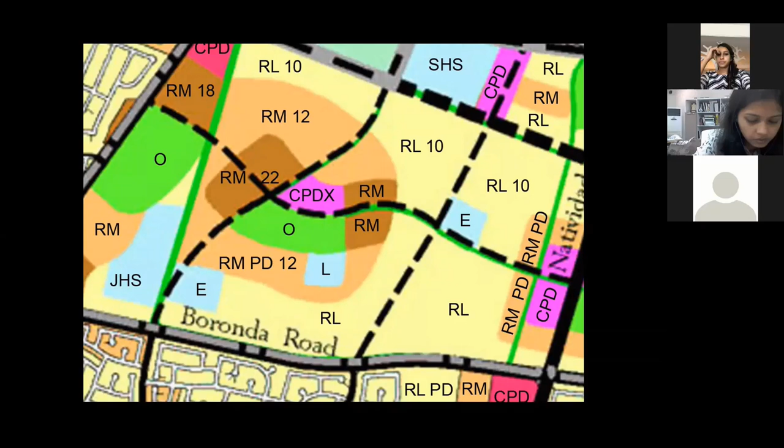Now, why did this happen? Because in the 1920s and 30s, when there were factories and they were throwing out toxic fumes, you could not live next to the factory. So the law had to be passed to take the residential areas far away from the factory. But this is not the 1920s. Many things have changed. Because of land use planning, what has happened is we are now living in cities where your office area is far away.

You have to rely on the car. You have a freeway, you have a highway, and there's traffic congestion and all these things. So before we go further, I want you to understand land use planning is a huge problem. It's a big legal problem in our city. The fact that you are not allowed to work where you live, that there is only a residential area, and this is largely residential, and you're not allowed to put office buildings there, is a huge problem.

I want you to know that in a place like Japan, I don't know how many of you have been to Japan, it is exactly the opposite. Tokyo is the densest city on the planet, and one of the most interesting cities on the planet. And the reason it is so interesting is because in Japan, the zoning is the opposite. In Japanese zoning, they never tell you which uses you can put. So if you have a plot of land, you can put residential, commercial, everything there.

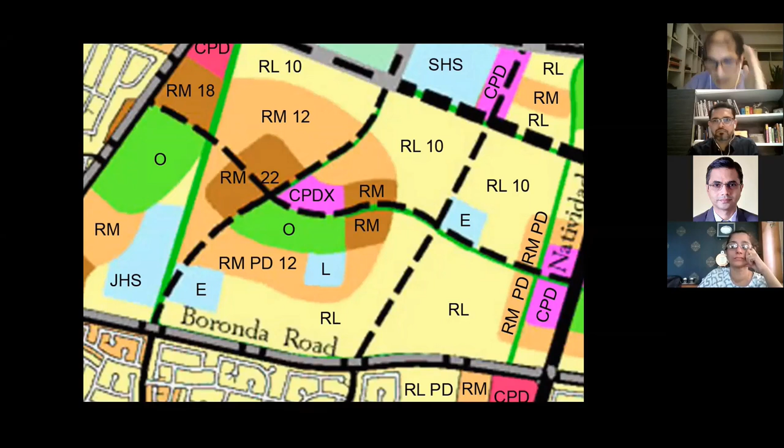The only rules they tell you is in certain areas, you cannot put industrial uses. In certain areas, you cannot put office use. This is very important. So basically, Japanese cities are constantly mixed in use. You can work, you can live, you can do whatever you want. It's very beautiful. So this is why Japan is very pedestrian. People don't have to go far away. And there are trains to connect. So land use planning is a big problem. It's a problem in Bombay, it's a problem in Goa, it's a problem everywhere.

The second problem is FSI. The biggest problem is FSI. We all know this, but let's try and understand what it really means. The funny thing we have discovered is FSI has very little relationship with building height, because you can take the same FSI and you can do a 1-story building, a 3-story building, a 7-story building. In theory, this is exactly true, right? Think about it. It's purely mathematical, right?

So in order to avoid this, they put another mathematical number called coverage. Coverage means in a certain area, you're only allowed to cover 80% of the plot, 60% of the plot, 50% of the plot. So what happens as a result is different people who are designing adjacent to each other have no rule that talks about how these buildings come together to make something nice. So I'll give you a classic example.

If you have 5 plots of land in Goa, let's take Azad Maidan. This is a place we know very well. Imagine tomorrow, for some magical reason, all the plots around Azad Maidan were empty. And we had this rule of FSI. FSI is, say, 1. Now, one person can come and design a 1-story building. One person can design a 2-story, 3-story, 4-story.

Right? This building right here is right on the street. This building is set back from the street. This building is even more set back from the street. This building is a tower. This building is a mid-rise. This building is a low-rise. What kind of Azad Maidan are you going to get?

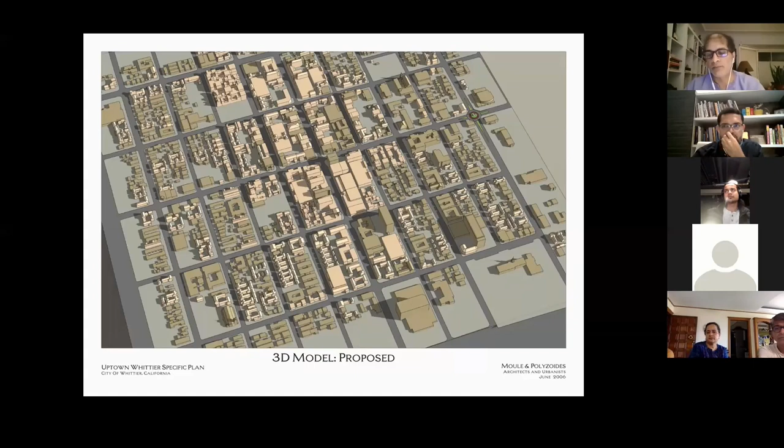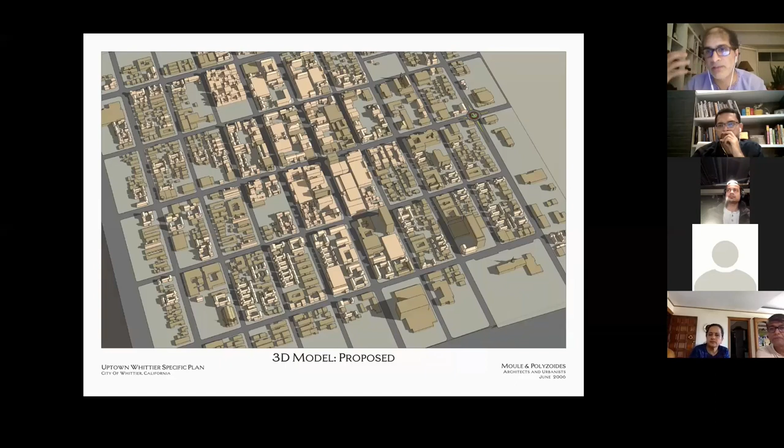So Pratima, this is a very important point that both Cedric and you are making. Basically, what you're pointing out is the perceived animosity between the public and the private sector, which is not good. Because everything you said just now basically implies that you are feeling the weight. You feel responsible that, damn it, I'm doing whatever I can, but the other side is not doing its job.

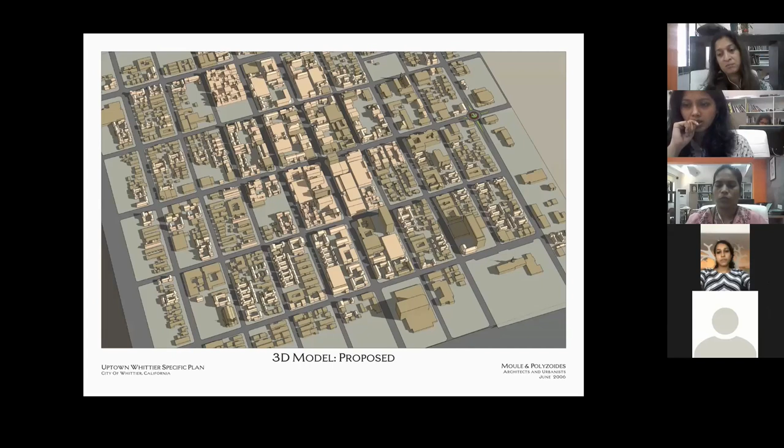The only reason we have been able to be successful in the US and maybe a couple of other places is because we have been able to call the authorities and the developers in the same room. This is the whole point I'm trying to make. So there are two ways of doing it. One is what Cedric is saying, where the private entity, the developer, says, I want to put higher density here. Give me the FSI. I'm hiring some of the best architects.

We'll give you a fantastic product. This will bring you a lot of economic return in the city, and I will pay for it. That is one way of doing it. The other way of doing it is you negotiate.

For example, there are cities which are desperate to get money. You know, every city is a corporation, right? Every city is a municipal corporation. They want to make money. They have a tax base. So imagine a city that is not doing very well. It's not making enough money because the neighboring cities are cannibalizing on its economy.

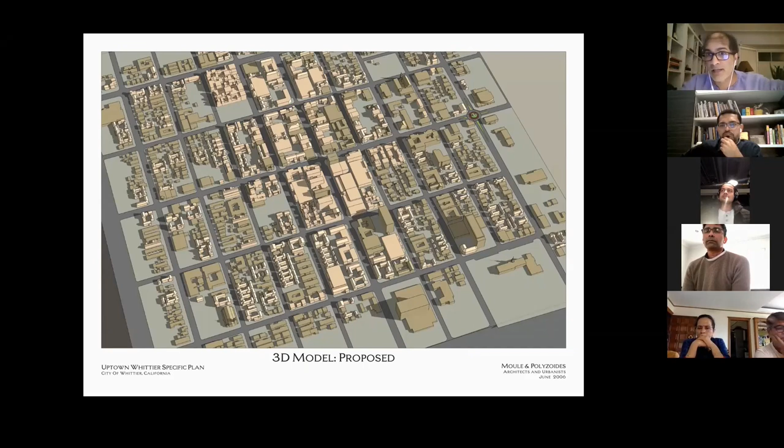Now, in such a city, you cannot make the rules very strong, because if you make the rules very strong, no developer is going to come to do development in that city. There's going to be no money. So what these cities can do is they try to put a carrot, you know, to lure developers, to attract developers. So they tell a developer, look, developer, we have some rules.

We will build a garage for you. We will give you an approval in 3 months instead of 6 months. All you have to do is come and follow our rules. So there are various ways, various cities, depending on what their circumstances are, create these kind of partnerships.

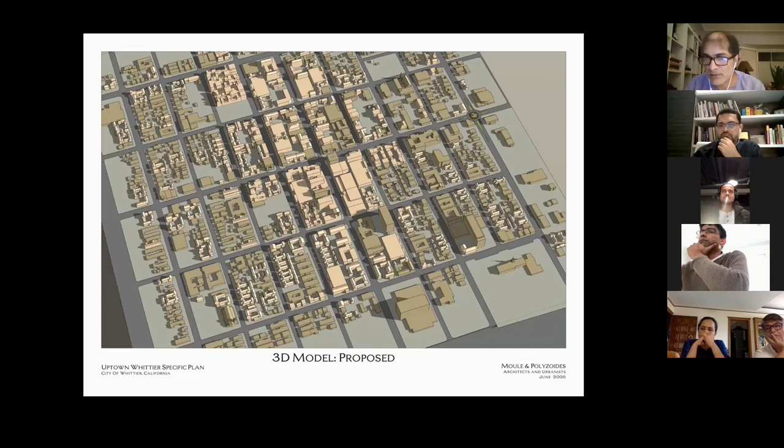The point Cedric is making is, whatever the case, the public and the private has to talk to each other. This is what you're saying, Cedric. I mean, even in the example you gave, the public sector talked to the private sector and said, look, developer, you have to pay for this. We'll allow you, but you have to pay for it.

Exactly. So this is very important for India, particularly for Goa, because the political connections that many of you have are going to be extremely important here. At the end of the day, every time we have an opportunity to do a project like this, every time we have been successful, the only reason we have been successful is because the mayor and the politicians of the city back it.

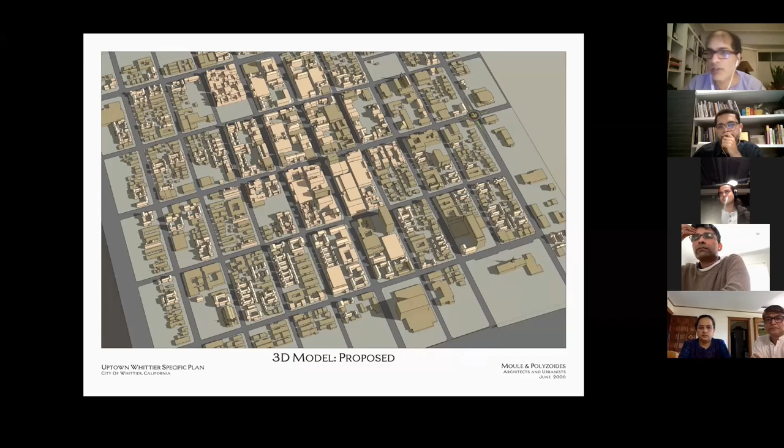If you cannot have the political structure back this kind of transformative instrument to change the vision of the city, the architects can do whatever they want, but it's meaningless, because we are powerless in the larger game of cities. We are small players. I always say to my friends, you know, it's like if you're playing the game of chess. Architects are the pawns. I don't know if you play chess. Cedric plays very well, but you know, the pawns.

But what we don't realize about a pawn is, if a pawn tries to act too smart, he'll get killed. But if a pawn works with the bishop and the king and the queen, you can make a checkmate in no time. The pawn is very smart. The pawn can do moves that nobody else can do.

So if architects learn how to work with politicians, administrators, mayors, planners, a lot of good things happen. So instead of thinking of ourselves as some kind of artist sitting in isolation and thinking of how crazy the world is, if we bring everyone to the table, I think it will be much better, particularly in Goa, because there is a lot of interesting political will.

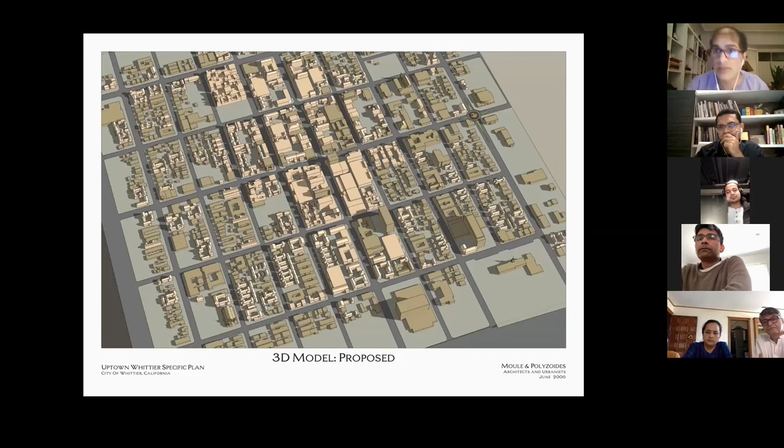There are a lot of people who think about these things. You just need to bring them in one room, and you need to put them on the table with people they know. So the more politicians you know, the better our chances of doing this. This is very, very important.

So out of this process, you get a drawing like this. This is a simple drawing, nothing big about this, that basically shows you where the infill, the new development can happen, how the streets can be treated, because you want the public spaces to be very nice, and you have an engineer that tells you what the capacity of the streets can be. That engineer could be from the city, or that engineer could be hired by us.

But basically what you're doing is, the architects are doing the design, the engineers are doing the utilities, and the landscape architects are doing the public land. These three things have to be done in the same room in that 1 week. We also have an economic consultant typically on projects like this, who is doing the calculation of how much revenue your real estate is going to be. So that is extremely important. So the more disciplines you have, the better it becomes.

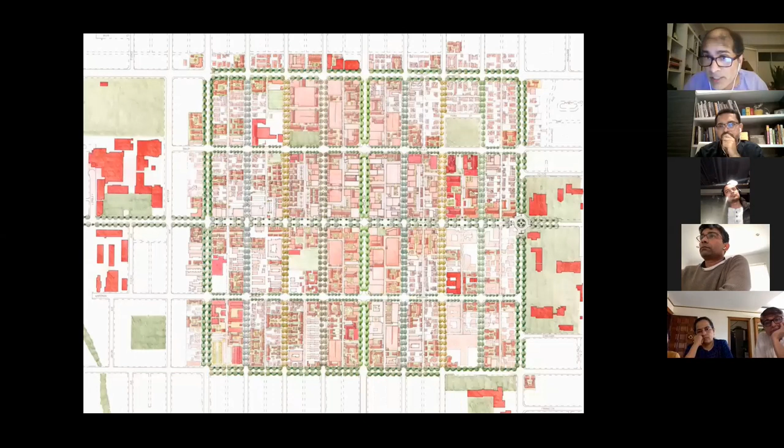Now the question is, all this is good, but how do you make a law out of it? So what we do is, here are all the plots of land, right? You can see there are streets, there are plots. Everything that you see in dark red is the area where the height is the highest, not FSI. I'm not even talking about FSI.

FSI is thrown into the garbage. These are the tallest buildings in the city. This is the place where the setback is the least. This is the place where the building can cover almost 100% of the lot. So in other words, this is the densest part of the city, because I've already decided along with the people in the community that this street is where they want the density.

Why? Maybe because there is a train track there. Maybe because there is a major bus line there. Maybe this connects an important opera house to something else. I don't know. That is all design. But because it's an important connection, you put the density there. Then you have the peach color, which is slightly lower height, slightly bigger setback. Then you have the orange color, which is even less. And then you have the yellow color, which is even less.

Now I'm coming into FSI, because if a planner comes to our charrettes, usually they ask me, what is the FSI? So what we do typically is we say, look, you can do an FSI calculation. If you say that the total FSI of this area should be 5, okay, fine, no problem. Here's what I will do. I will make the FSI 10 here, 7 here, 5 here, and 2.5 here. If I take the average FSI of this place, it will still be 5.

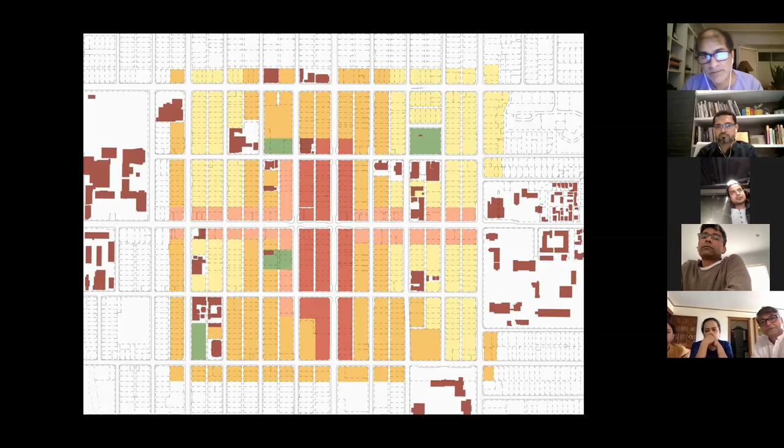Now comes the various laws. What are the laws we write? The first law is the land use standard, because planners still like to know what is permitted here, right? Which use is allowed here? They want to know. So what we say is, okay, let's get it out of the way. Big deal. So here is the rule chart.

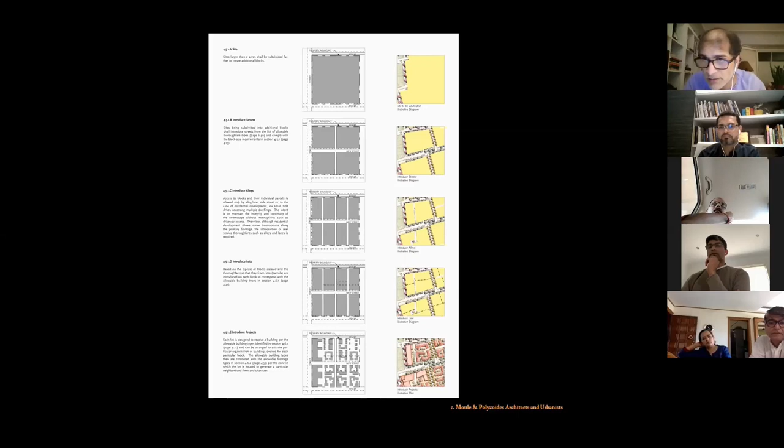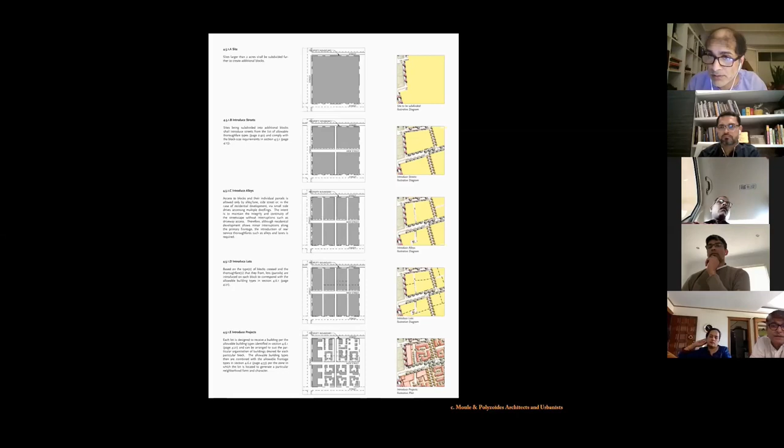What we have realized is this has a lot more value in the real estate market, at least in our experience, even in India. Because some people want to live in 4-story buildings, some people want to live in 2-story buildings, paying a higher premium. Some people who don't want a bungalow-like place can live on the 9th floor of an apartment building. So what happens is, for a developer, it's more profit. You can now sell units in a more expensive way that are low-rise. You can sell expensive units that are more mid-rise and high-rise.

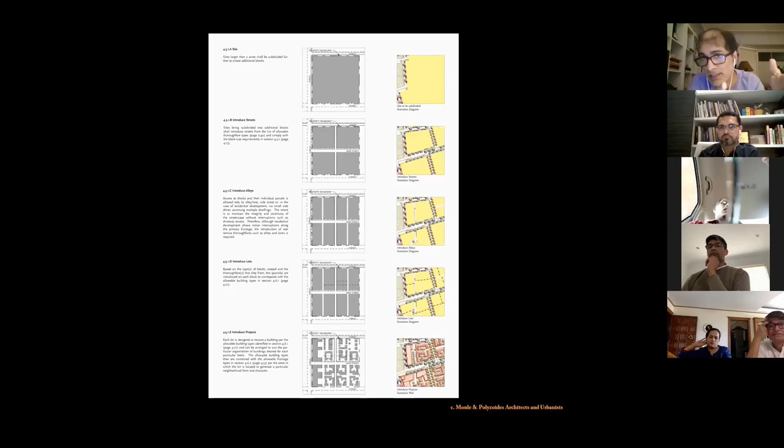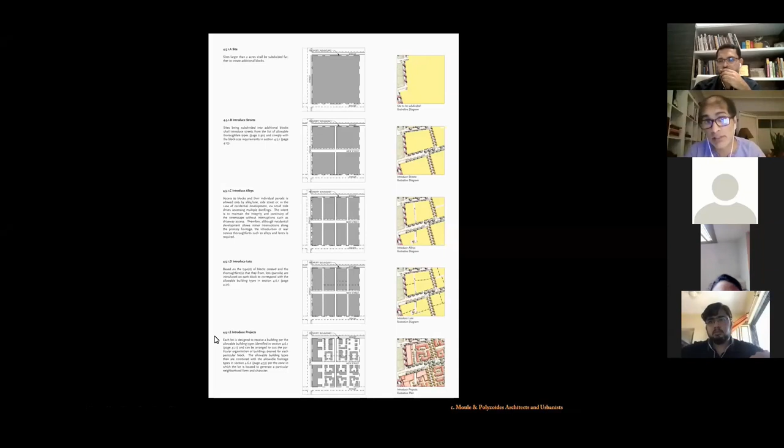If you follow this route, you don't have to go through the city council hearing. In the US, it takes 6 months to go through planning commission, city council, get your entitlement and all that. So we say, just follow this route. And if you do it this way, you don't have to go through it because they've already approved this law. So you follow this law and you get entitled in 2 months and you go and build your project. A huge amount of savings.

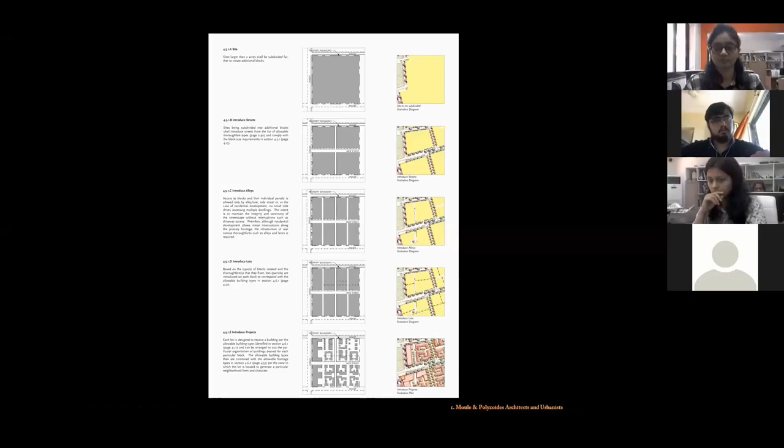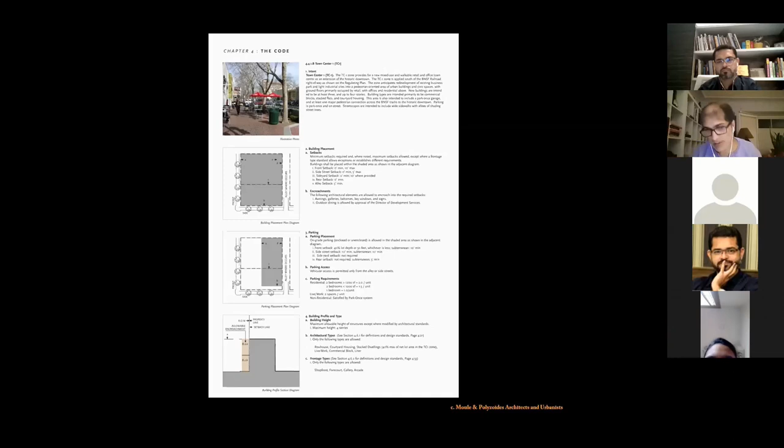What this slide tells you is this is the street. The only place where you can put parking is in the back side of your plot. In other words, for the first half of the plot, you are not allowed to put any parking. Now that is a classic reversal of the law that has allowed the person to make a strip mall. Right? A strip mall basically puts parking in front, puts the building at the back, by law. Because there is nothing in the code that tells him you cannot put parking in the front.

But this law reverses that. It says you cannot put parking in the front. You have to put the building in the front. The building face has to be the street face. We don't like it, sorry.

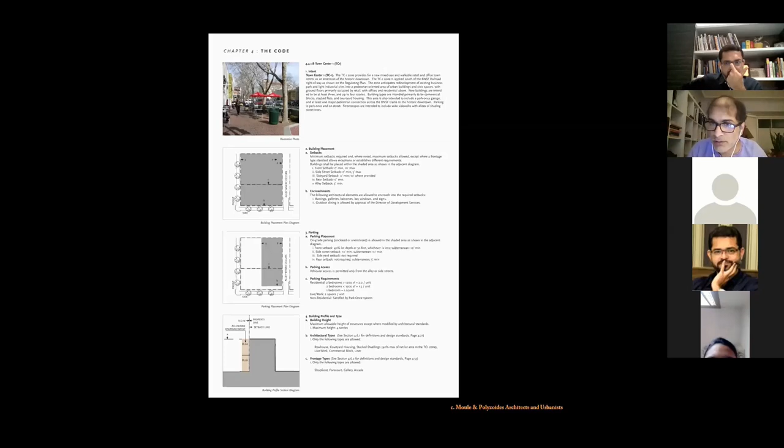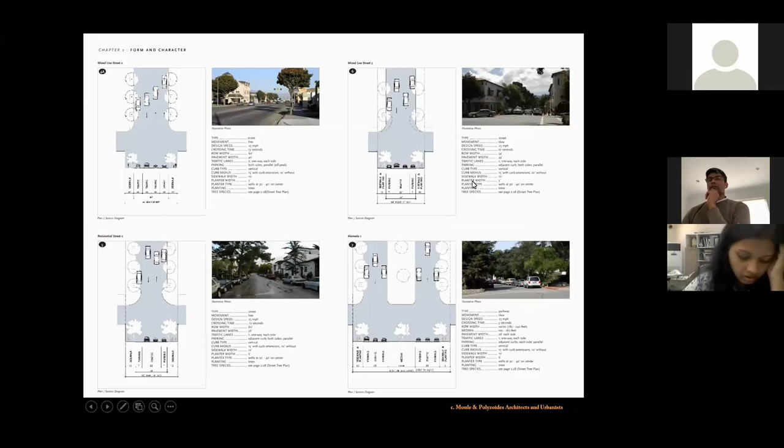But it is backed by our politicians. It is backed by our mayor. He wants it this way. He's fed up with the way you guys are doing it. And for each street, you write a law. It basically says, this is this type of street, this is this type of crossing, this is this type of paving, this is how the street is. So when the time comes to improve the street, you have all these standards. Sidewalks like this, this, right there. It's simple. This should be done for Panjim actually.

What is different in this versus the rules that Panjim has right now is the roads of Panjim are designed as if they're meant for cars. They don't talk about trees. They don't talk about sidewalks. They don't talk about street furniture. They're not part of design, right? They're just meant for engineering. They're just meant to take cars.

But the moment you write things, tree species, planting, planter type, sidewalk with curb radius, parking, traffic lane, pavement, you are now basically saying, here is a law that balances cars, people, furniture, trees, everything. So you cannot just design the street for cars. By law, this street cannot be designed for cars alone. It has to be designed for everything.

Next thing you put a law for is the open space act. Parks. What is a park? What is Azad Maidan? How would you define the rules that govern Azad Maidan for the next 20 years? I don't think this exists in Panjim right now. Imagine one of the most beautiful spaces in Panjim is the church square, Mary Immaculate Church Square. There is not a single rule. There's not a law that is written for Marine Drive. It's only written for buildings. So before you get into buildings, it's possible we could write laws for the open space.

But streetscapes are becoming very important. There are a lot of beautiful projects in India now where urban designers are taking over streets. And that is wonderful. So this is something we should do for Panjim. Imagine taking Panjim and doing this to it. You identify all the streets, church square, this, that, simple. Identify what they are and create a strategy for them.

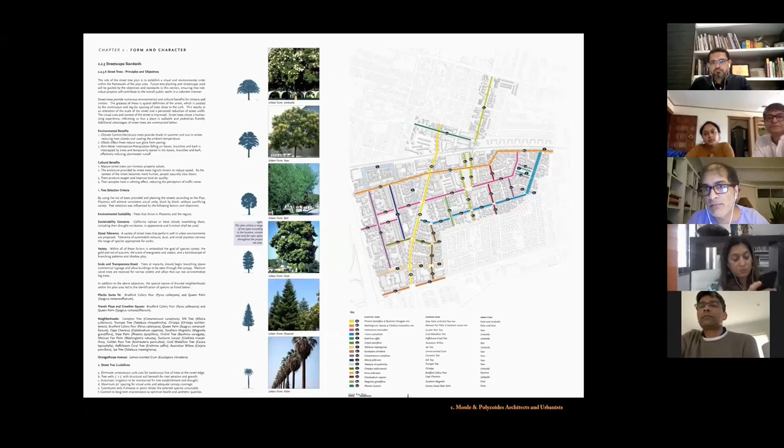This is so easy. Any of you can do this. You just take it. You get your landscape architect. You get a civil engineer. You put it together, and you create a palette for all the main streets. You don't have to touch every single street, but the main streets you should do. This is simple, and then you write the law. You can have Gulmohar trees, you can have Indian trees, you don't have to have Western trees. It's right there.

I was attending a webinar of MCHI, that is the organization of the developers here in Bombay, or in, say, India, with Sadhguru last week only, whereby in the introduction only, Sadhguru told all the developers that you are doing a fine job, but you are constructing an oasis in your plot and you are not building a city. That is his point.

And because of this, you are not making a name in the industry. If you think of the city, then definitely your industry can grow. But at the moment, you are thinking only about your plot and your development. No doubt that you are doing a fine job in your plot, but it is an oasis in the city. It proves to you, city planning is eventually urban design, architecture. This is just pure logic. It's not rocket science. It's just simple common sense, right?

Bobby, I appreciate the idea of streetscapes you have introduced in the town planning as such. The fault in our town planning laws, I think, is that they are all written by the engineers and not by the architects. And unfortunately, architects are not part of the process which makes the laws here in Bombay. All engineers are involved in making the laws here.

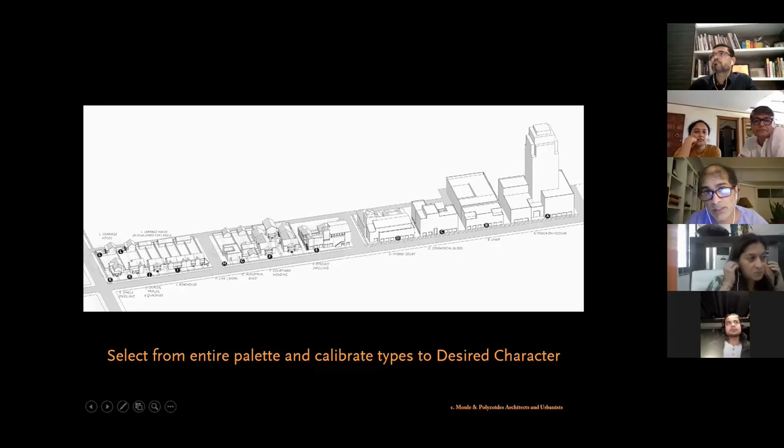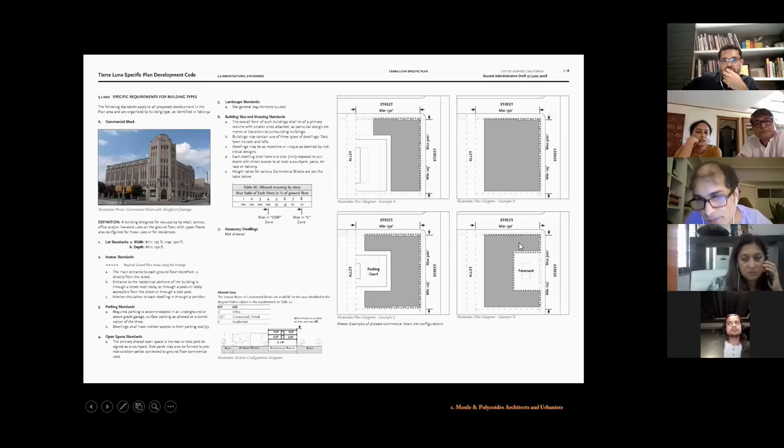So the last thing is building types. After we have done all the streetscape and everything, we come to how you translate building form in terms of the residential building typology. This is a very difficult subject, but I'll just share it very quickly. Here are bylaws that show you how buildings can be configured on a site. Now, this has nothing to do with style. Nobody is telling you to design a building with a straight line. If you want to jog this back and put a curve here, you can do all of those things. Nobody's taking away your creativity.

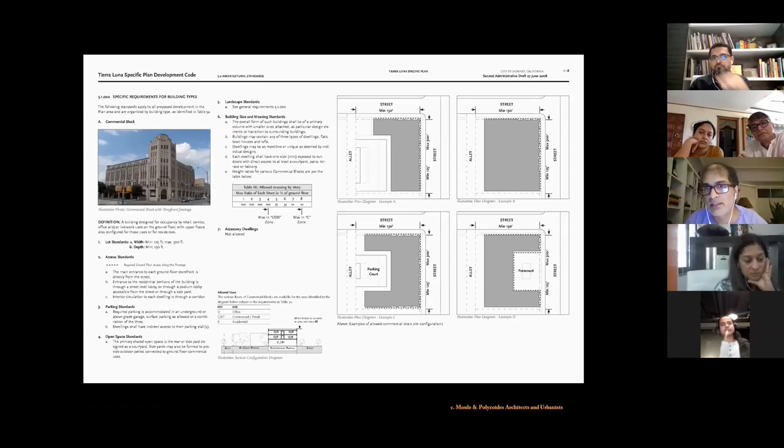But fundamentally, there are only 3 or 4 ways of doing buildings. You can either put a forecourt towards the street, you can put a court behind, you can make an L building. In other words, the details of the building may change, your sculpturalism may change, but fundamentally, there are 3 or 4 ways of doing it. This is very important. Depending on the kind of building, we give a range of density. So here is your density. Note there is no FSI, but there is density.

Density meaning, if you take an average unit of 100 square meters... what is the average apartment size in Goa right now? Like a 2-bedroom apartment, how big is it in Goa? A 2-bedroom apartment would be anywhere between 85 to 100 square meters. 100, so say 100 square meters. So if you take an average of 100 square meters, you get a density number. Assuming that an average unit is 100 square meters, these are density numbers.

Now, why is this important? This means that if you have 1 acre of land, or whatever hectares you do in India, your maximum density can be 100 dwellings with an average of whatever. So instead of putting an FSI number, you put a density number, because it allows you to calculate the amount of infrastructure that you will need to support those kinds of units. Then you have your areas, and it goes on and on. We can talk about the details.

Then there is building and massing. Now this is very important, because if you only give a maximum height, you get buildings that look like this, right? Or the colonies that we are talking about in Caranzalem, right? Because they have a maximum of 8 stories, pack the heck out of it.

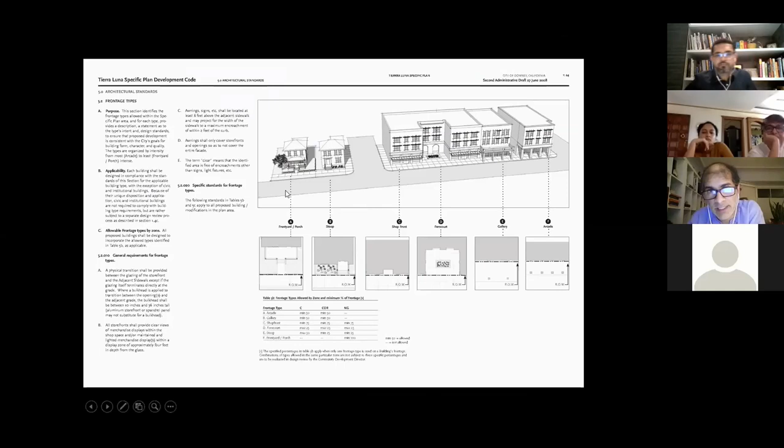So what do we do? We write a law that tells you what the faces of the buildings should be in these places, and we call them frontage standards. So you can do a porch, you can do this, you can do this, you can do this, and they are shown here in 3D. They are shown in section, right? This is nothing special. I mean, you guys can do this.

Imagine having a law written for Church Square that tells them that all the buildings along Church Square should be from here to there. You have to follow one of these. You have to either have a shop, or a court with some of the building coming to the property line, or the building to the property line with an arcade, or a recessed arcade or something. Imagine if all the buildings listened to you, you would have something very special.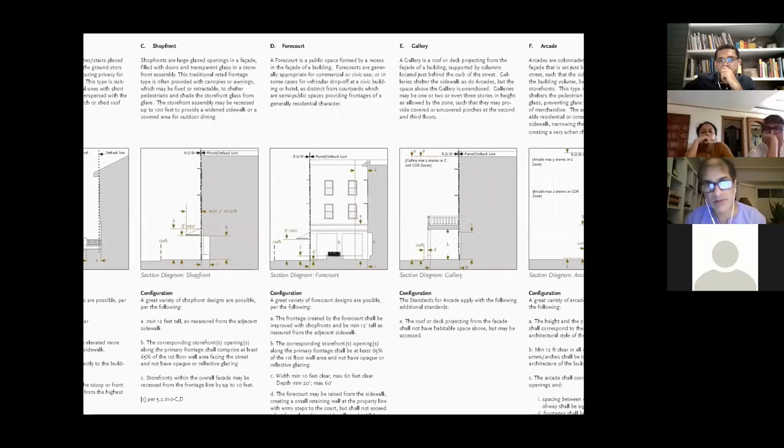The style could be different. Some buildings could have modern windows. Some buildings could be like containers. Some could be whatever. That's not the point. The point is we're all doing something in common. So in certain areas of Panjim, it's absolutely imperative, I think, that we do this. Because otherwise, anything goes. That is going to destroy Panjim, in my opinion. You should do your crazy architecture in other areas.

And the last thing, and this is not something that I advocate very much, because I think style is the individual expression of an architect. We should have no say in that. Architecture is also an art, and it should be left to the architect to create his own aesthetic. That is without question. But I want you to know that there are some cities that have hired me not only to write laws, but to change the aesthetic look of the city.